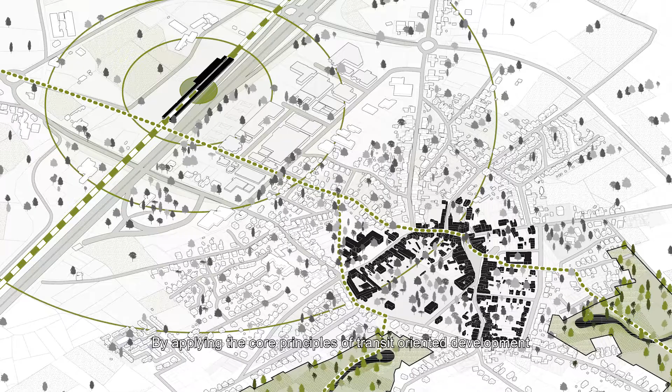To face these challenges, we make use of this station's exceptional accessibility. This station serves directly major cities as Brussels, Antwerp, Rotterdam and Amsterdam. By applying the core principles of transit-oriented development, we valorize its accessibility and transform the station into a new urban core for Brecht. We do this firstly by pushing back the presence of cars through the introduction of a new mobility spine, solely reserved for slow modes of transportation. This new spine also serves as the glue between the village center and station environment.

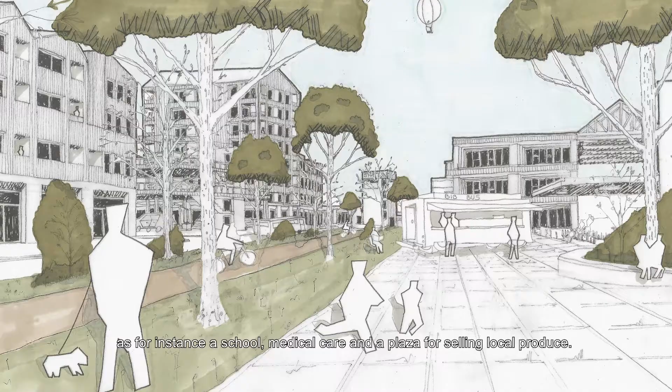Secondly, we charge the station environment with new types of housing, office spaces, recreational and social amenities as to make a vibrant, dense, yet green area. Furthermore, we upgrade the urban fabric that lies in between by densifying the residential area and by loading it with amenities that the community lacks today, as for instance, a school, medical care and a plaza for selling local produce.

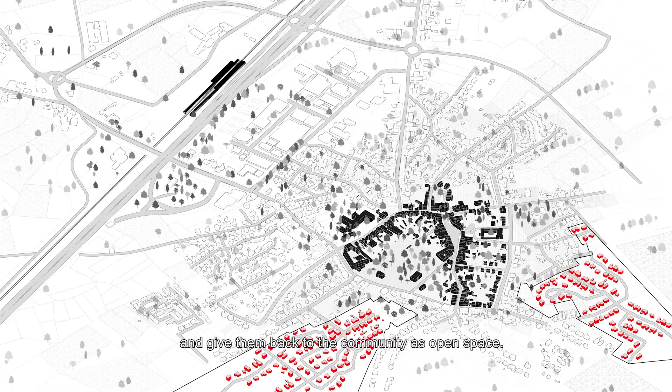Thirdly, we aim at conserving Brecht's local identity by introducing greenery to connect the village with its rural hinterland. Meanwhile, with this project, we managed to reclaim up to 250,000 square meters of expansion zones currently surrounding the historic center of the village and give them back to the community as open space.

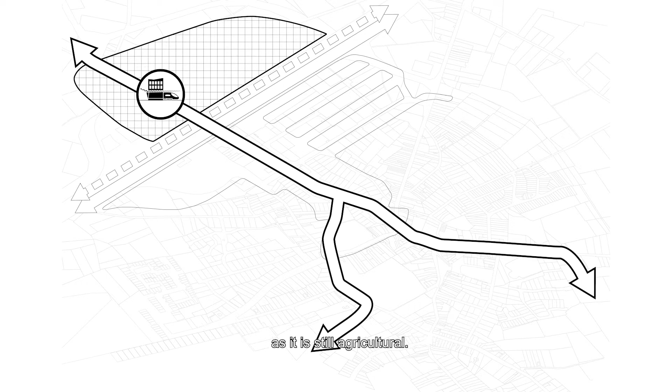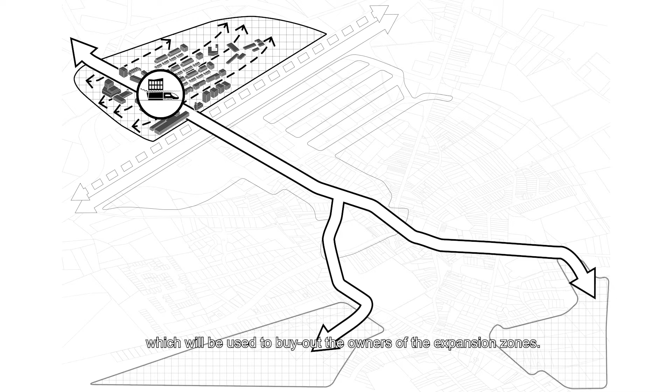To guide the implementation of this development, the project is supported by a strategy using the station environment as a financial lever. In the first phase, the municipality of Brecht will acquire land in the station environment as it is still agricultural. When acquired, Brecht will rezone the area, causing land values to rise. As Brecht sells the land to developers, profit will be generated which will be used to buy out the owners of the expansion zones. In the second phase, the remainder of the profit will be used to reprofile the current industrial zone, investing in new amenities for the local community and upgrading existing ones.

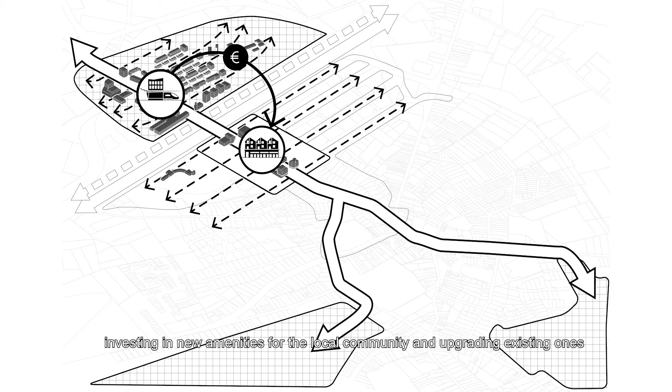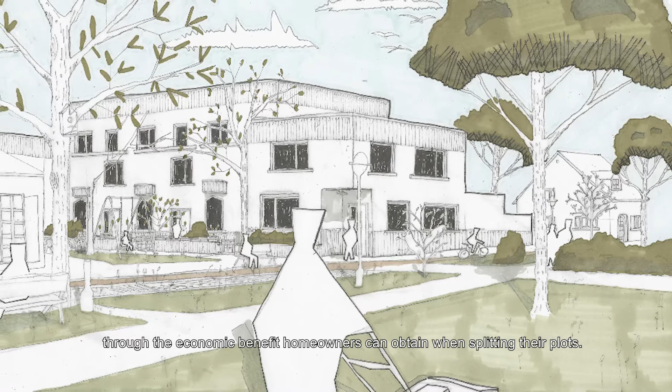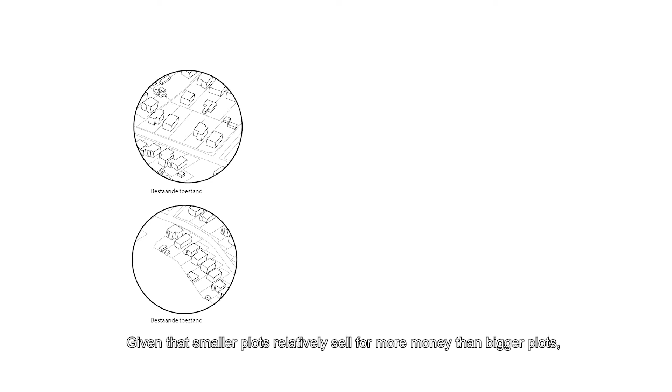The third phase embodies the transformation of the residential zone through a soft densification policy. In this strategy, a denser residential area is realized through the economic benefit homeowners can obtain when splitting their plots. Current real estate in the area is considerably old, making it so that the value of properties mainly resides in their land value. Given that smaller plots relatively sell for more money than bigger plots, homeowners will profit more from splitting their plots before selling. Thus, smaller plots will be formed, making it possible to implement new types of housing at higher densities.

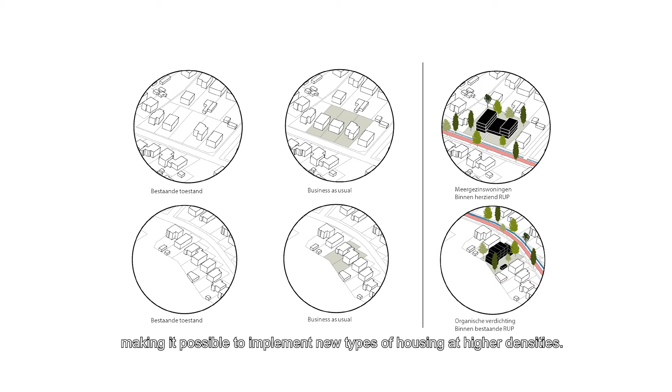With this project for Brecht, we believe that we can spark the transition towards a more efficient use of space while moving towards more sustainable modes of transportation.